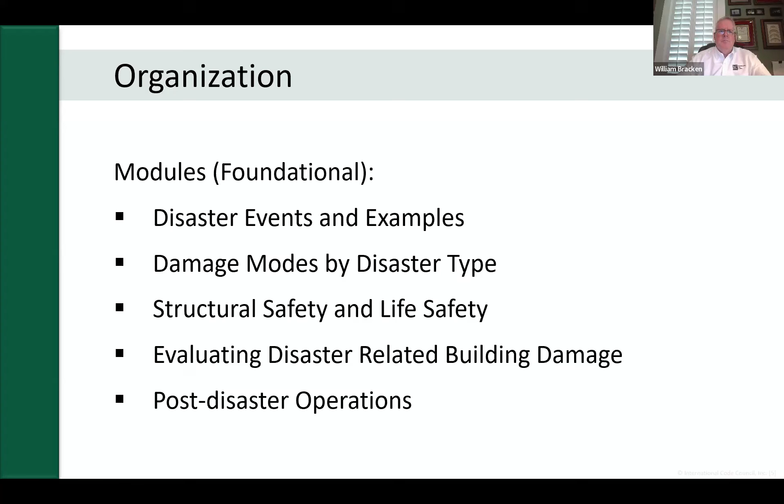And then the second type of module is an operational module. And when I say operational, what I mean there is, how do we actually do this? And what type of conditions, hazards, situations can we encounter when out there and doing these evaluations?

Finally, it gets into the actual processes, and it provides a vehicle for attendees or students to practice these evaluations through case studies, examples, practice examples, and so forth. And then finally, the ultimate goal of these evaluations are the placards or the signage that we will be posting on the buildings. And it gets into the types of signage or placarding and the rules upon which those placards are affixed to the buildings.

So as I said, the goals and objectives overarching are when these post-disaster evaluations are performed, when they are successfully executed, they will help to keep our citizens from entering potentially unsafe structures or buildings, while also minimizing any displacement or permanent displacement. And while those two concepts may sound to be in contrast, they are not.

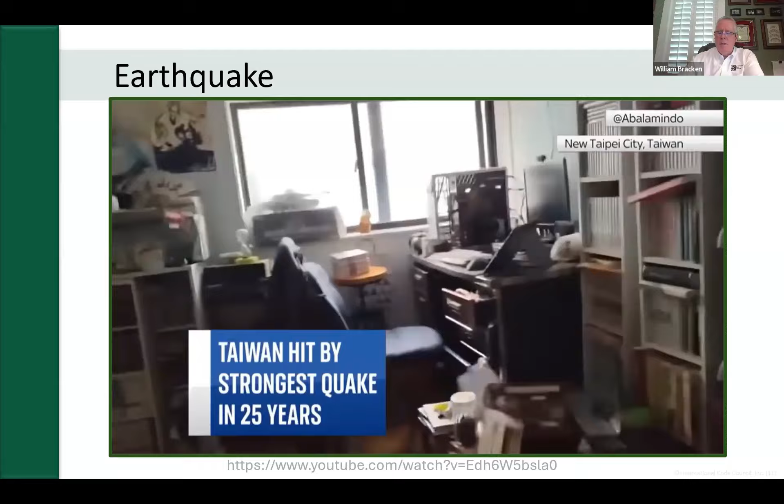This first one is some video footage. It's a compilation of videos that were put together based on an earthquake that occurred in Taiwan. And so you'll see some footage and possibly hear the sound on some of these. Not all of them have sound, but these video footages are generally about 60 seconds or so in length.

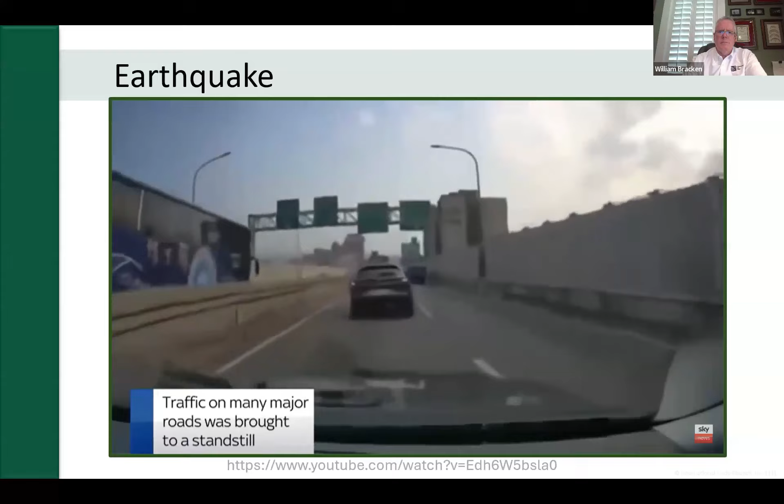So as I said, this is a compilation of footage, but both this image here and this one show basically individuals on a bridge. But the next series of images, you're going to see the outcome and some of the buildings that were impacted, such as the one you see on the slide right now.

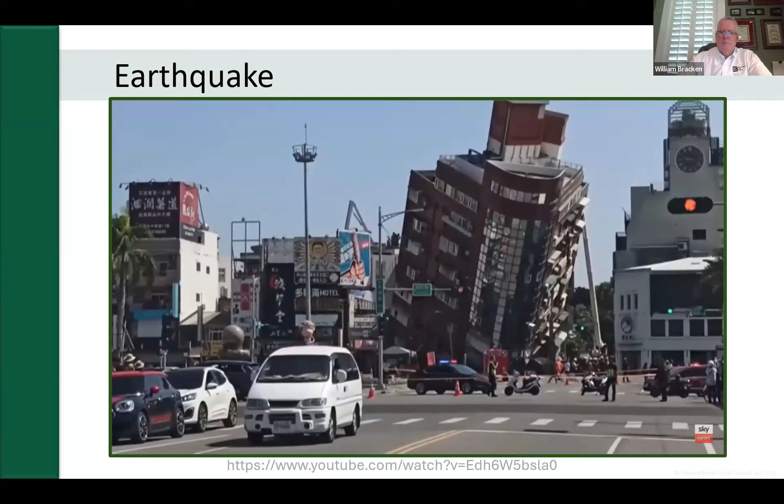So that was earthquakes, and that's the format you're going to see for each of the 4 types of disasters in this version. The next disaster type it talks about is flooding. And so some examples of flooding were the 2009, 2010, 2011 floods that occurred in El Salvador. Additionally, there were 2010, 13, 14, 15, and 19 flooding events in Bolivia. And then, of course, 2006, 2008, and then significant flooding in 2016 in Ecuador.

This next footage, again, to illustrate the impacts of flooding, is actually a compilation of flooding. This was coastal flooding related to a hurricane typhoon type of event. This was in the US. And what you're going to see is about 60 seconds again of footage, but you'll see the impact of storm surge and coastal flooding as it builds.

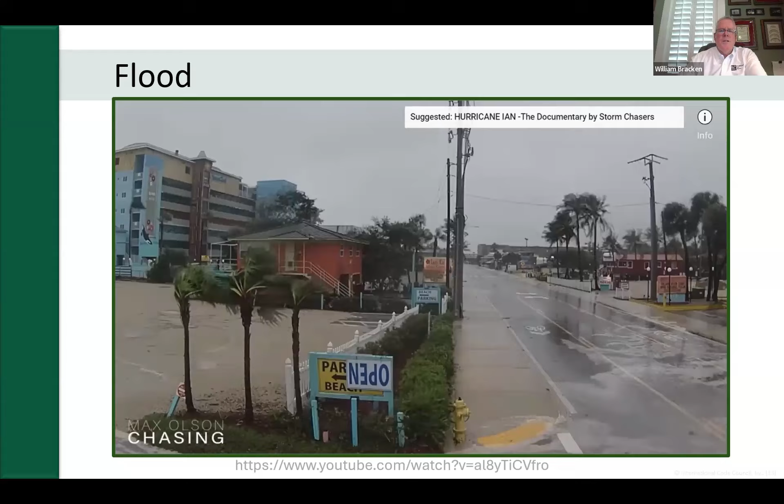What I'll ask you to do is, as this plays out, keep an eye on the building in the foreground, the reddish shaded building, and see how it fares as this water continues to build and the intensity increases.

So again, the purpose of the footage is to help those that have never experienced these types of disasters, or just to kind of ground where it is that we are. That's the intent of the footage. The third type of disaster that the training focuses on are high wind events. And so high wind events are actually broken into 2 subcategories. The first subcategory being tornadoes.

Some examples of tornadoes would be the April 1993 Buenos Aires tornado outbreak. That was an event that in 1993 resulted in 100 independent tornadoes affecting that region. Another example was in 2009, the tornado outbreak in Santa Catarina, and forgive me if I mispronounce anything, but nonetheless, that one particular tornado event resulted in destruction of more than 80% of the residences in that community.

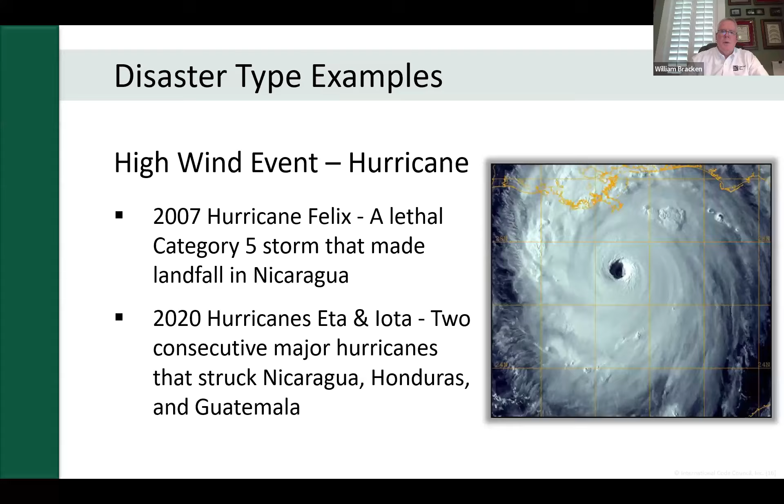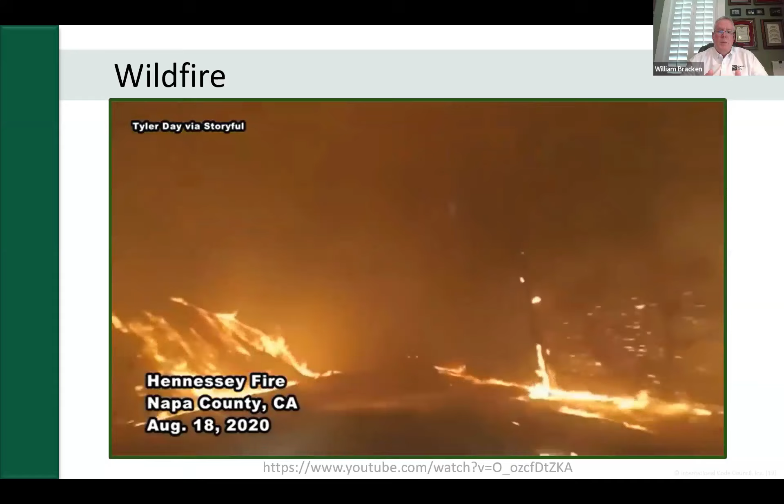This came out of Northern California. The footage here is from some fire crews that were in the fire. They were actually traveling from one spot to another when the fire changed direction, swept over, and they found themselves engulfed in the actual flames. This is from a dash camera, but the firemen successfully made it out. This gives you some idea of the intensity of those types of disasters. And then afterwards, most of the buildings were significantly or completely destroyed.

And then, as I said, at the end of each module, there's always the opportunity to provide further discussion, take any questions, provide any answers, and so forth. We will not see it as we move through the balance of this presentation, but it's worth knowing that at the end of each of the modules, there are opportunities to further discuss items.

The second module, having introduced the disasters and the disaster types, then gets into damage modes, or specifically, what are the various types of damage that these disasters can cause to buildings. Focusing on the 4 different types of disasters and keeping in mind that each of these disasters will have different impacts on buildings and the built environment. It's worth talking about how each of these disasters impacts buildings, because that provides a frame of reference for individuals going into communities after a disaster. They will already have some idea of what type of damage to look for and how to anticipate the damage that they will be evaluating.

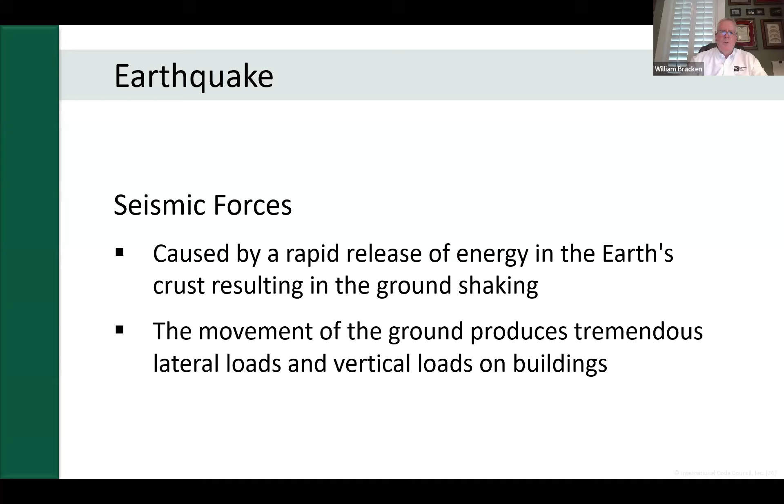In other words, all of the plates on the Earth's surface are constantly moving. When 2 plates become fused or stuck, the energy continues to build. As those plates continue to move, the energy will eventually overcome the friction force holding those plates together. The plates then release, and that is a release of energy. That energy then shakes the ground in multiple directions, forward, backward, side to side, as well as up and down. The ground is moving, and so naturally the buildings sitting on the ground are going to be moving as well. All of that is explained in much greater detail, so that the participants will be able to, in later modules, see how to look for that type of damage.

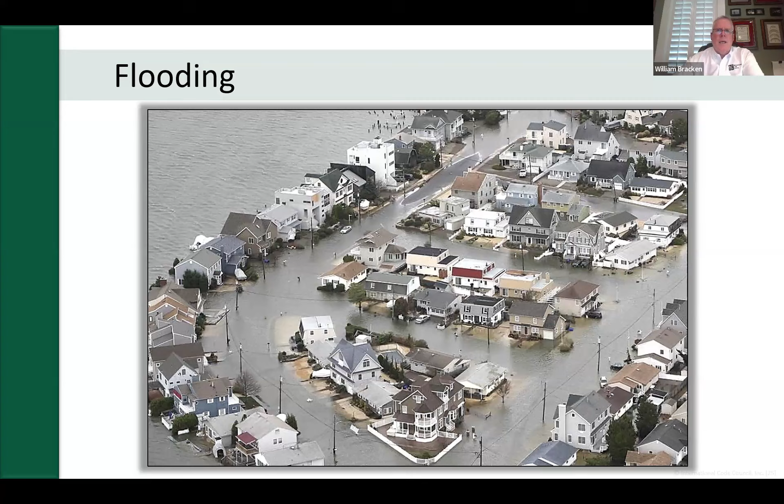The second type of disaster was flooding. Similar to earthquakes, what is a flooding event? How does it occur? And more specifically, how does flooding impact or damage buildings? Flooding can cause damage to a building in one of 3 ways. It can saturate the ground and possibly building components, and by saturating them, it softens them. That can sometimes lead to settlement or partial collapse of aged, deteriorated, or weakened building components.

The second method that flooding causes damage to buildings is through hydrostatic force. Hydrostatic force is that buoyant force, the force that basically causes ships to float. In other words, anytime you displace water, that displacement can cause the building to lift or shift, thereby damaging the building.

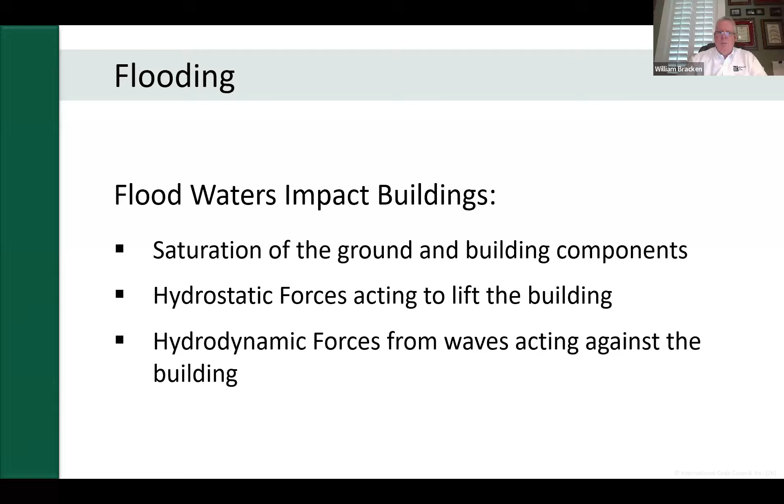The third type of disaster and damage caused by disasters is high wind. As I said earlier, we break it into two categories: tornadoes and hurricanes or typhoons. But really, whether it's a tornado, a hurricane, or a typhoon, wind impacts a building in three ways.

The wind flowing around and over a building will put pressure on the outside of that building, and that pressure translates into loads. So we want to make sure that the building is capable of supporting and resisting those loads.

But the other ways in which wind loads can impact buildings is by windborne debris, or picking up items, carrying them downwind, and creating openings in buildings downwind, breaking windows, breaking doors.

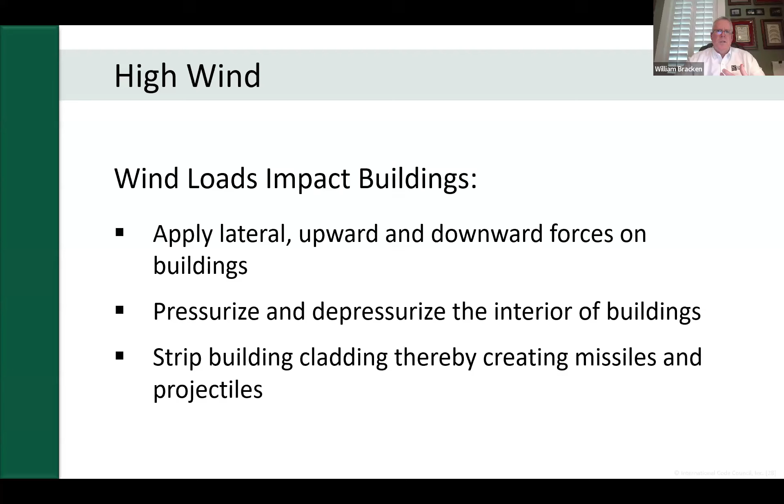The reason that's damaging, aside from the broken windows or doors, is once that opening is created in the building, the wind and wind pressure can get inside and pressurize the building. When that internal pressurization combines with the external pressurization, that's when buildings start coming apart.

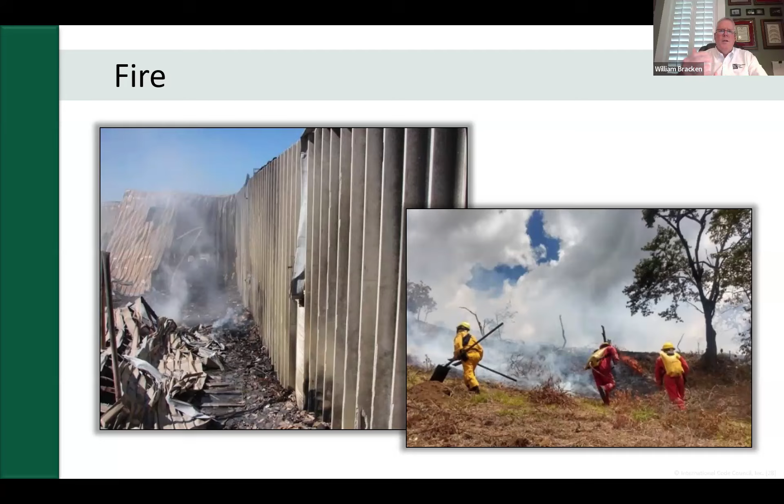The last disaster type is fire. Here we talk about how fire and heat, or thermal events, impact buildings. As you can see on this slide, it's the fire itself and the heat from that fire that matters.

Please keep in mind, it's not necessarily the flame that causes the damage. The flame is merely a byproduct. It's the heat, or the heat energy, that causes the damage.

The heat energy can change material properties. It will cause wood to burn. It will cause steel to elongate, soften, and deform. It can cause concrete to become brittle and crack.

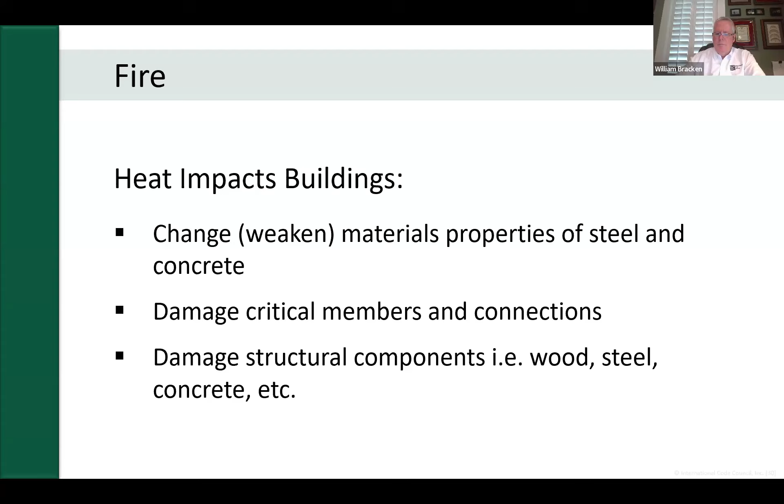So with fire, the focus is on the members, the materials, and what the heat energy has done to those components. As mentioned on previous slides, the training goes into much greater detail about the effects of fire and its impact on buildings, how to look at buildings affected by fire, where to look to determine if a building has been impacted, and if so, to what extent.

So I think you can see we start off with a discussion around disasters, then we go into a discussion around how those disasters and their effects impact buildings and the built environment.

Next, we go into the fundamental structural and life safety components that we need to know when evaluating these buildings. So to say it another way, this next module looks at how buildings are put together, and how we're actually going to determine if a building has been impacted by a disaster, and if so, to what extent.

This module focuses on the types of structural systems that exist. It focuses on determining how the evaluator is able to determine structural safety and how the evaluator is able to determine life safety. Because at the end of the day, all of this training comes down to making sure the evaluator is looking at these buildings and determining whether that building has basic structural safety and basic life safety or fire egress. We'll talk about the significance of each of those as we go through.

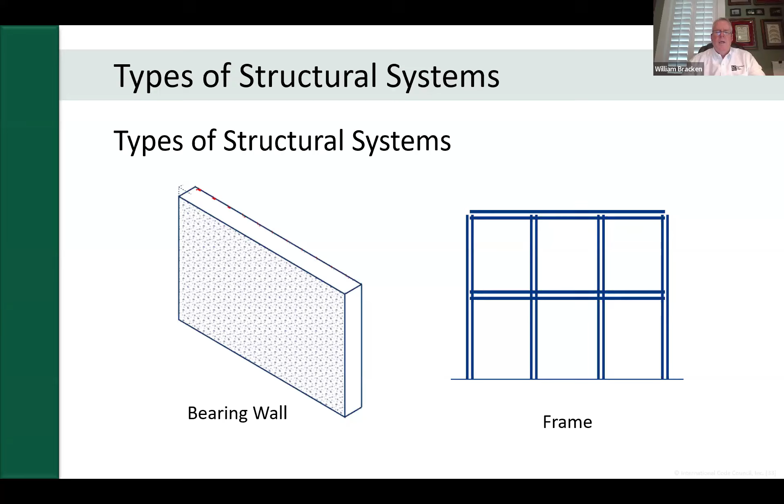And so the two types of structural systems are what we see on the screen here: the bearing wall system and the frame system. We go through and talk about how the bearing wall and the frame receive loads and how they're affected by overloads.

In this particular slide, you can see the bearing wall. The bearing wall is simply a wall that receives a load from above or from the side. That wall then carries that load down to the foundation, where the foundation resists that load.

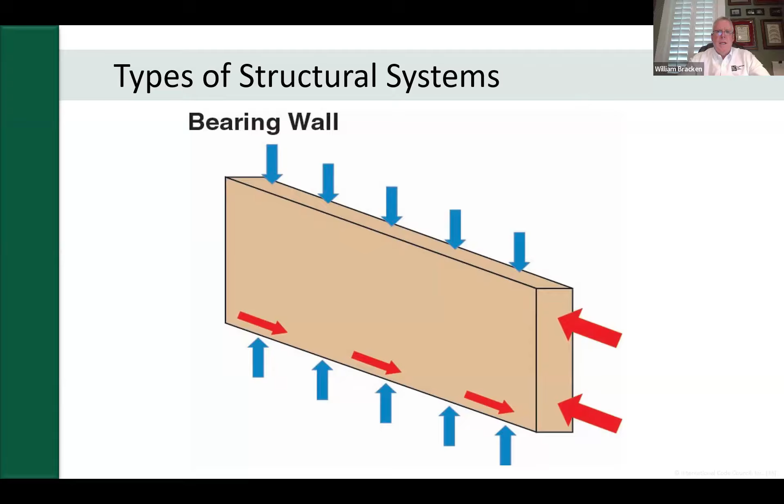As we apply loads to, in this case, a bearing wall, we need to understand how those loads travel through it, and the same thing with the frame. So with the frame, it's all about how the loads travel through that structure type. In a frame system, the load gets applied to the floor, then from the floor it goes to the beams, from the beams it goes to the columns, and ultimately from the columns it goes down to the foundation. That is our load path.

Understanding the load path through the bearing wall or the frame helps us know what we're looking at, what we need to evaluate, and what parts of the structure we need to determine have been affected or damaged by the disaster or not.

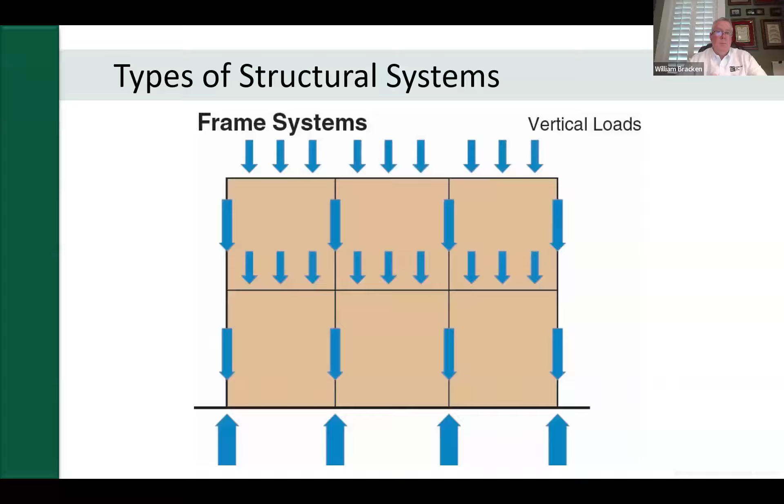Part of that process of evaluating the load path or structural components is, one, determining the load path the building relies upon. Once the evaluator determines the load path, they're able to look at the frame components, the bearing wall components, the connections, and the foundation to determine if there is adequate structural safety.

When going through that process of examining the load path, you also want to determine the redundancy and the ductility. I'll give you an example of that. The load path is, as we see on the slide here, and the training provides multiple examples for many different types of structures and structural systems. For the purpose of this presentation, I'm just using one as an example.

When we get to the load path, here we can see a traditional roof over an exterior bearing wall. The load path here would start at the top, go from the roof into the bearing walls or supporting walls, from the bearing wall down to whatever type of foundation system we have, and then ultimately down into the foundation.

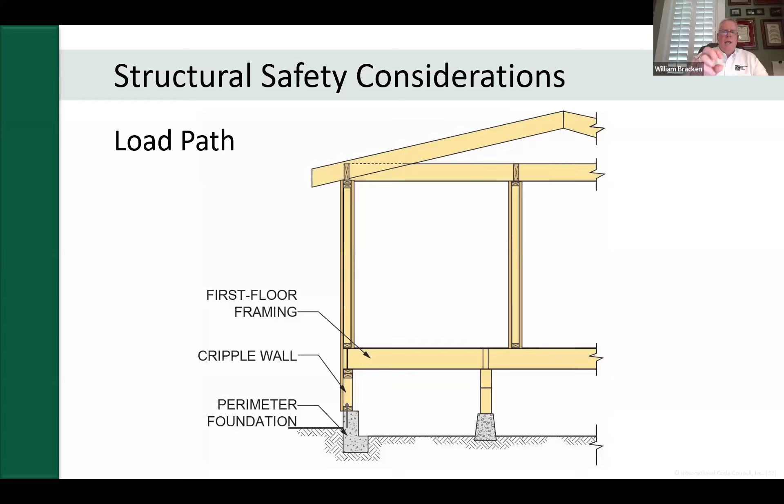It's the process that the trainer walks the attendees through for each of these elements and their connections: how do we identify them, and how do we evaluate them in the field?

The other part of evaluating structural safety is determining redundancy. On this slide, you can see two simple examples. The top example is considered a simple system, meaning it has no redundancy. As you can see in the graphic, it's made up of two columns and one beam. If it has no redundancy, if I lose one of these elements, then the entire system fails and falls to the ground.

As becomes apparent later in the class, in a simple or non-redundant system, that's when you get total collapse, the building falls to the ground. And quite honestly, we're not needed there, because even the basic resident, the layman, can identify when a building has completely collapsed.

Really, the focus is on what we need to evaluate when a building has redundancy, as we see in the bottom graphic. In the bottom graphic, we have three columns supporting a continuous beam. It is possible for that building to lose one of those columns, and that beam is still going to remain. That is what we call a redundant system.

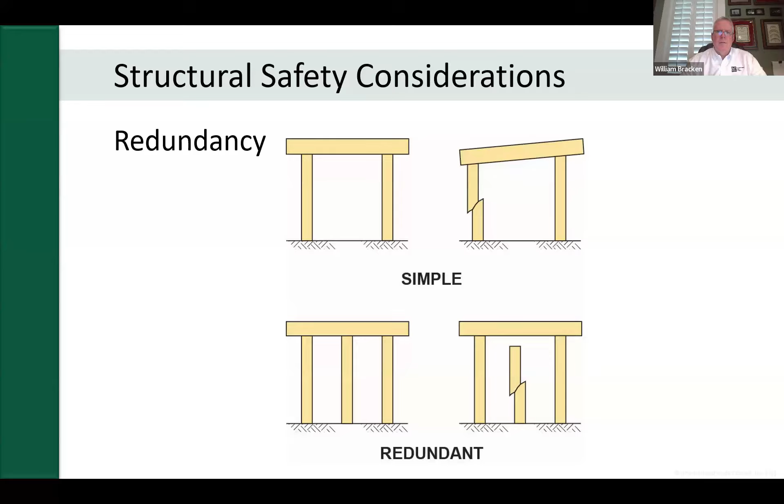The final piece of evaluating the load path is ductility, or determining ductility. When we say ductility, really what we are doing is looking at what the structural system is made of and determining if it may have additional strength beyond what we're seeing, or in engineering terms, additional capacity.

Simply put, we have two types of systems: one is ductile and one is brittle. In a ductile system, as you see in the blue portion of this graphic, that's a steel type of system, meaning if I have a structural steel frame, that frame has a great deal of ductility—it will bend and move and deform before it fails.

The evaluator is trained on identifying if that structural system has ductility, if it can continue to bend or move or not, versus a brittle system. A brittle system would be an unreinforced brick masonry structure that has no tensile capacity or no ductility.

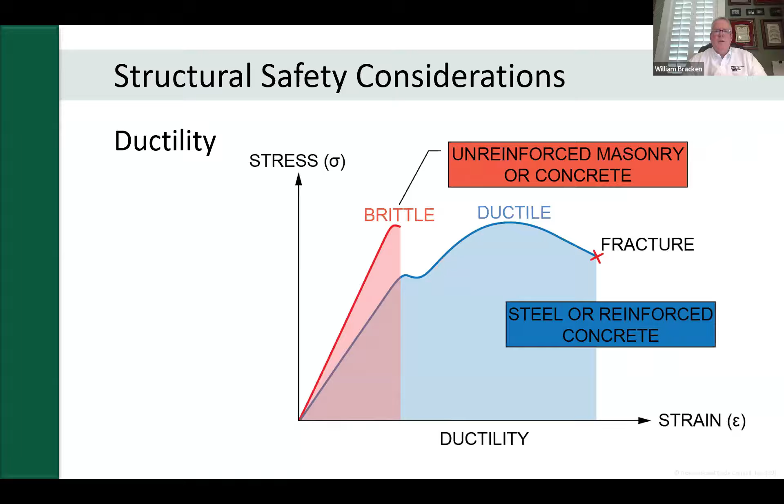In an unreinforced masonry system, there is not going to be much ductility. And so when it is subjected to movement or additional movements, it is subject to total collapse.

As I said, the training utilizes video footage to provide examples. This video, about 60 seconds, shows an unreinforced masonry building during an earthquake, I believe during the Mexico earthquake a number of years ago. When I launch the video, the camera will pan to the right and you'll see a multi-story brick building. The footage was captured by people who were evacuated from that building using their cell phone. This serves as an example of a non-redundant, brittle system that cannot handle movement, and you'll see the outcome.

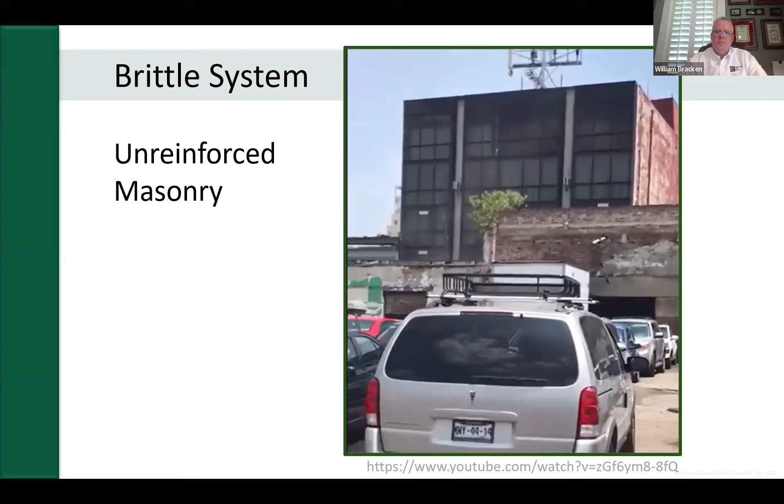You can see the building is shifting. It's moving side to side. So you can see that's an example of a brittle system that does not tolerate movement.

I have not included all of the videos. I've included a few here to provide some examples of the modes of training that are employed in this class.

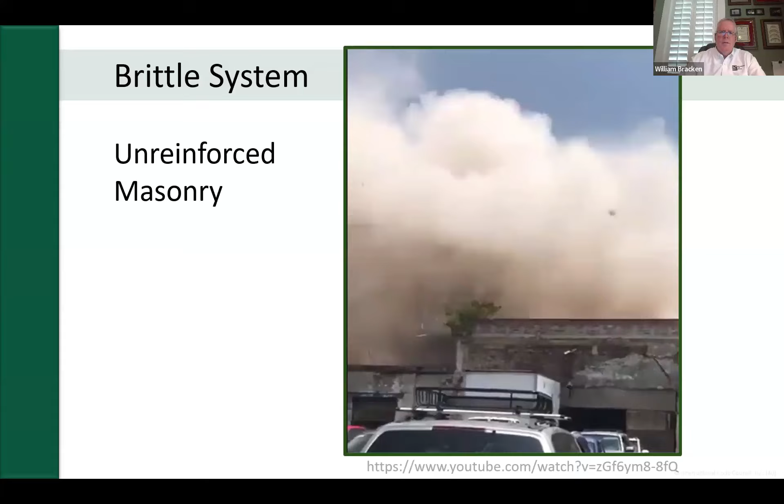So all of that was the structural piece. As I said at the start of this module, there is structural safety and life safety, or another term for life safety is fire egress. Structural safety is, quite simply, will the building continue to stand? That is key to us determining whether it is safe for the public to be in there. But the second component to all of this is egress, fire egress, life safety.

That is quite simply, if something bad happens, if the building catches fire, can the people in that building still get out safely? That is fire egress. In order for us to tell the public that a building is safe to reoccupy, the building must have structural safety and life safety, or fire egress. It's all about whether the public can exit that building safely in the event of a subsequent disaster, a fire, or some desperate need to get out.

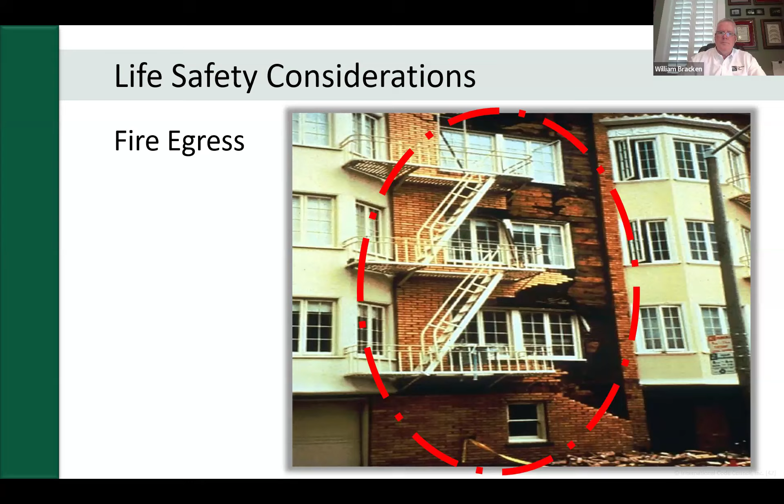As I said, the training goes through multiple examples. It pauses for questions and takes questions. This training is designed to engage the learner in as tactile and hands-on a method as possible.

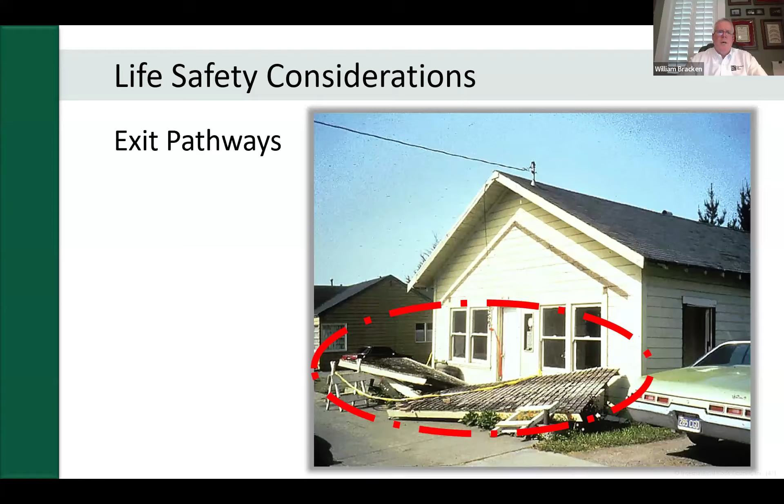Let me pause here for a second, open it up, and see, Jose, if there are any questions. I've noticed some items going into the chat box, but I haven't had a chance to look at them. If we have any questions, anything you want me to address at this point, I'm happy to get into it. So far, I don't see anything. I put a message there that I'll be monitoring the questions, but I don't see any questions at this point. Okay, I appreciate that, Jose. Sure.

At this point in the training, we started off with an introduction of the different types of disasters. Then we moved to how those disasters impact buildings, the forces and the manner in which they cause damage. The previous module talked about how, when evaluating a building, we have to identify that it has adequate structural safety and adequate fire egress. This module, module 4, takes all of that and brings it together by providing examples of damage to the different types of structural systems caused by the various types of disasters.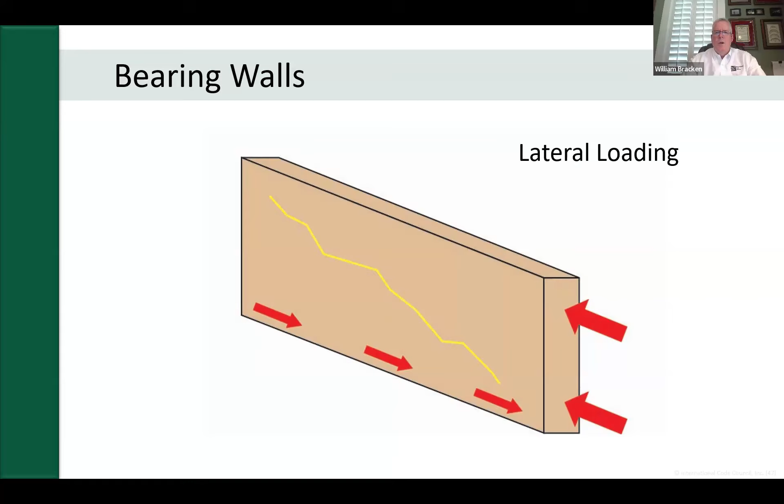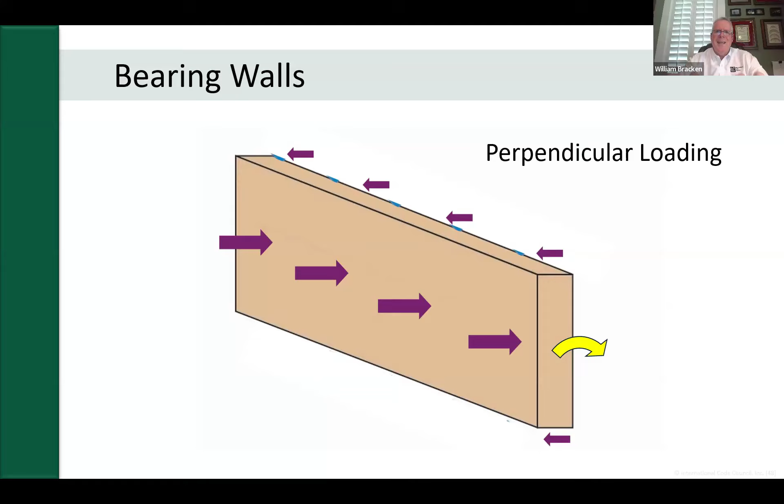The third method by which bearing walls can fail is when they are loaded perpendicular to the wall, resulting in bending, distortion, or rotation of the wall. Just as with the first two types of damage, the training goes through examples, providing photographs of this type of damage to help the evaluator identify or diagnose it when doing their evaluations.

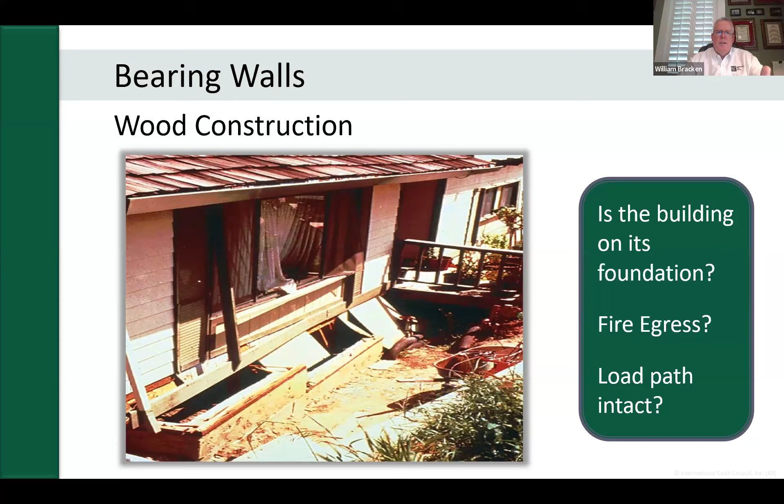This would be one type of example. In this case, we're looking at a bearing wall structure - a residential structure that was affected, and the upper bearing walls, roof, and structure were pushed or shoved off of the foundation. You can see towards the bottom of this image just how much that front wall has been pushed back, and the building has been pushed off of its foundation. This is used as an example throughout the training, providing photographs, illustrations, animations, and video footage to help the evaluator diagnose these conditions and interpret them from a structural safety and fire egress standpoint.

The other thing, and this is an interesting point to make at this point in the presentation and in the training, is that the point of this exercise is to look at the building immediately after a disaster, to determine if that building can be occupied by the public, whether it's safe for the public to occupy, whether there are limitations, or whether it's just not safe for them to be in there at all. So the process is to go through this, make that determination, and put a placard on the building.

But it's important that the evaluator recognize that placard, the signage we're going to put on this building, is not permanent - in fact, it's very temporary. What I mean is we are looking at this building immediately after a disaster. We are only making a determination regarding basic structural safety and basic fire egress. All of these buildings are going to be damaged and will require some method of repair, some extent of repair.

We are not making that repair determination. We are merely making a rapid evaluation of whether it's safe at this point in time for the public to go in and access that building. As time goes on, the building can become worse. The thresholds, or the level to which we will let people re-enter buildings, will return to normal. So this placard or signage we put on these buildings is temporary.

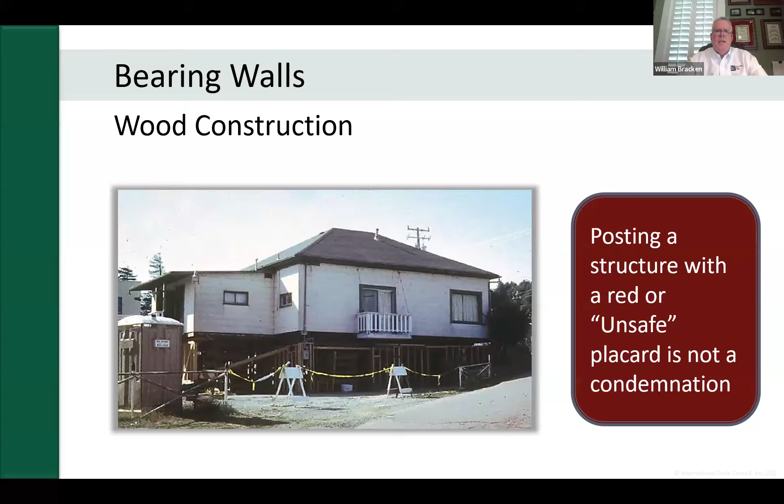So just some of the subtleties or finer points that are part of this training that are imparted or shared with the attendees so that they have that understanding when doing the evaluations. So just like we did that with the bearing walls, we then go into the frame, which are the column and beam structures.

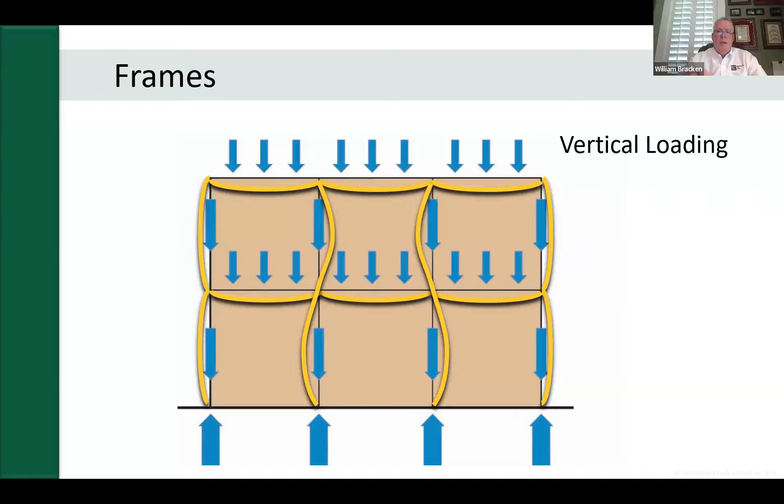So the column and beam structures, when they get loaded from above, you can see the blue arrows would indicate loading, and the load path, as we said previously, went from the slab to the beams, from the beams to the columns, and from the columns to the foundations. And so when this gets overloaded from above, it will cause the beams to sag or the columns to bend, as you can see in this graphic.

Bill, we have a couple of questions that I want to address. Yeah, please go ahead, Jose. Yeah, before you continue, because I think it's related to what you're showing. From William Hudson, are you considering the inclusion of Type 4 construction?

So I appreciate that question. Thank you. The Type 4 construction, so we have various types of construction that relate to flammability, right? Or how protected it will be from fire, or what it's made of, so that we can determine the level of fire protection. This training and this exercise does not consider any compromises to that. What this training focuses on is far more fundamental. This training focuses on strict structural safety and fire egress. So that's what this training is.

The evaluation of the type of construction and the impact the disaster has had on the type of construction and its fire rating, so to speak, that is at another level. That is done later in time by your design professionals. Okay, yeah, he says that he was thinking about the reactions in heavy timber. Okay, so with heavy timber, that would be a frame type of system. And so in a frame type of system, the evaluators, the attendees of the class, are trained how to identify the load path. So in a heavy timber system, it would be identifying the load path as a column and beam type of system. So you evaluate the columns, the beams, and the connections.

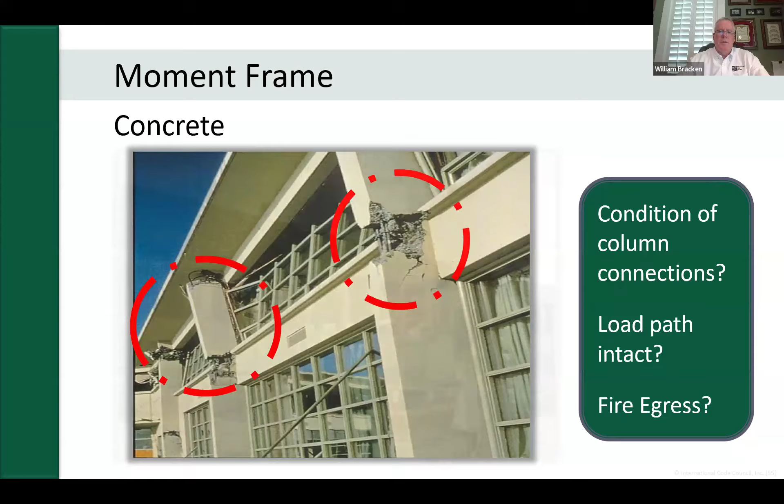This slide and the next slide are also examples of the concrete moment frame structure. In fact, this one was in Southern California back in the 1990s, an earthquake down there. This was a concrete parking garage that was damaged by the earthquake. And so in this image, you can see the parking garage immediately after the earthquake. And inside those circles, you can see where it is the column to beam connections that have failed.

Now, this slide also serves as a point of illustrating redundancy. And so, as I said earlier, part of evaluating a load path is also determining whether the building has redundancy, why it is still standing, if it is still standing. And so in this example, all of the beam to column connections had failed, but the building was still standing, and that was due to redundancy.

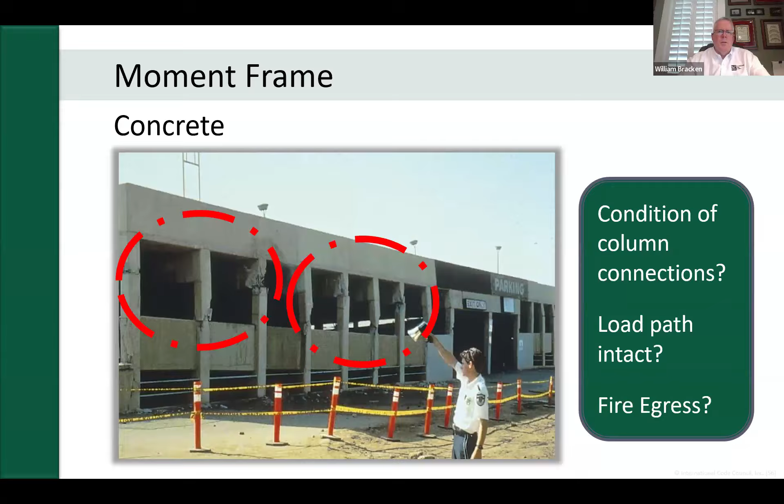The point here is just because a building remains standing after the disaster does not mean it is still safe to occupy. And so while this is what the building looked like after the initial earthquake, this next slide is what it looked like after the very first aftershock.

So the earthquake caused the damage. The building remained standing because of redundancy, but it did not have adequate structural safety. And that point was illustrated when the aftershock occurred and the balance of the building collapsed, as you see in this slide here.

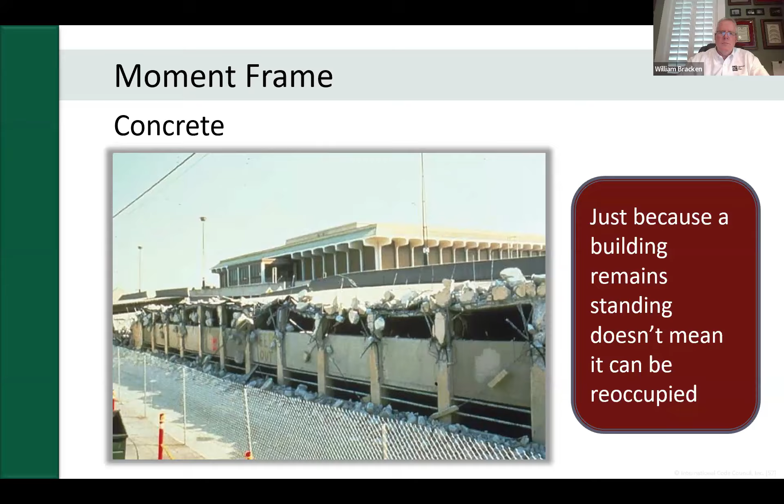And then, as I said, the training talks about bearing walls, it talks about frames, and then it gets into precast systems. And so with precast systems, it focuses on precast segmental systems as well as tilt wall systems. And it goes into them in a fair amount of detail. For the purposes of this presentation, I'm just going to show you a few slides of the segmental example.

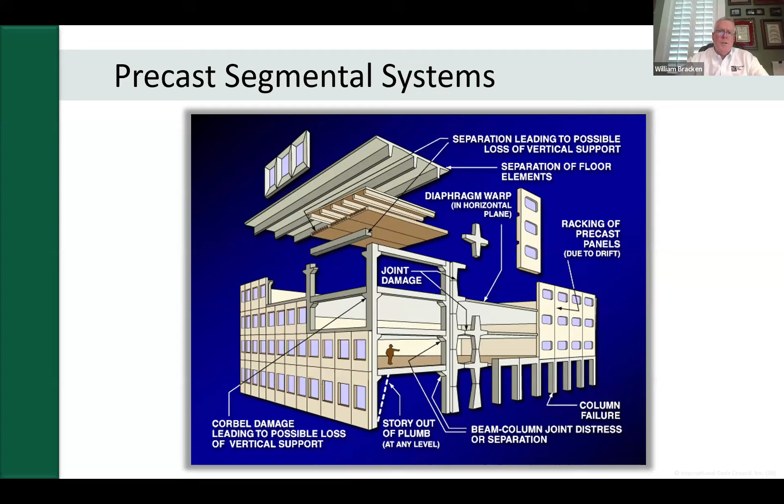But a precast segmental system is when the columns, beams, slabs, wall segments are precast offsite, brought to the site, and then assembled on site.

And so the training goes through and provides examples, as you can see in this particular slide here. This was a parking garage. It was precast segmental, brought to the site and assembled. This damage that you're seeing here was actually the result of a flood event. In fact, the flood event here was roughly 4 meters deep of flooding.

So what happened is the first elevated floor became submerged in the floodwaters. The floodwaters then lifted that floor off of its supports and dropped it to the ground. And that's what you're seeing in this image. The significance of this is that, and this is typical to all types of precast segmental systems, when that slab was lifted off of the supports and dropped to the ground, that slab was not only being supported by the columns, but that slab was also bracing the columns.

And so the significance here is while the structure is still standing, the upper portion is very badly damaged, and the columns, which were designed to have been braced by that lower floor slab, are no longer braced and are now only capable of supporting half the load they were designed to support. So again, the training helps to educate the evaluator or the participant on how to read damaged buildings, how to evaluate the load paths, and how to determine when the building's structural integrity has been affected or not.

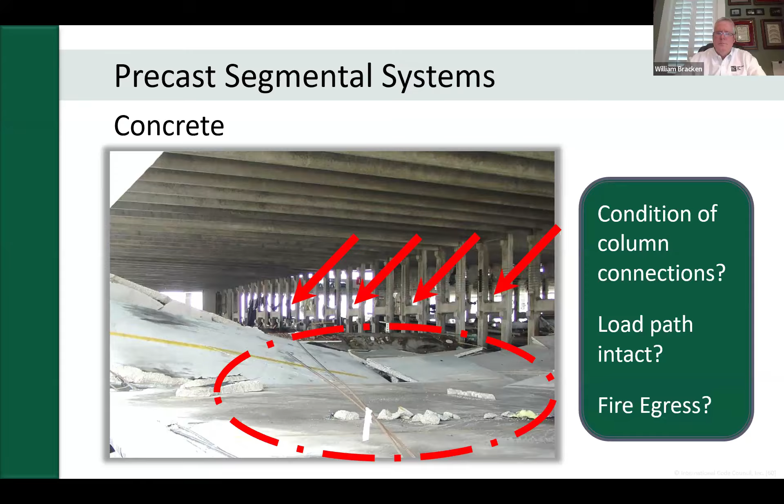This is some video footage of a parking garage, parking facility. And one of the things that this training also talks about is progressive failures, continuation of collapse, and so forth. And so it also serves to reinforce that just because a building remains standing after a disaster does not mean it's safe to occupy. And so what you're going to see here when I launch this video footage, it's just a few seconds long, but what you will see is that as the segments and the sections begin to fall, other sections that were dependent upon it also begin to fall. So let me play that.

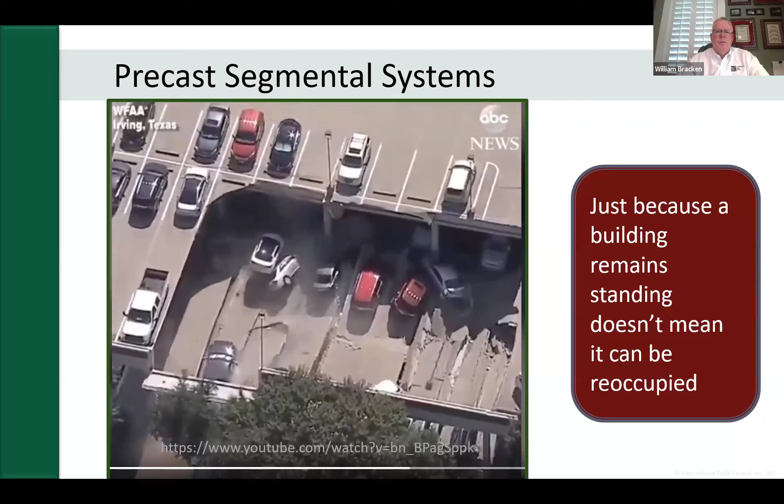So you can see in this particular example, it was like a domino effect. So the 2 slabs failed, then the next slab failed, and then it actually continued on through the structure. So just because a structure remains standing after a disaster does not mean it's safe to occupy. So that is that module.

And, again, at the end of each module, there's examples, there's discussions, making sure that the attendees are understanding these components, these foundational elements. The next module is post-disaster operations. And at any point here, Jose, feel free to jump in if there's any questions.

So this next module, post-disaster operations, this is where we will take a break from the structural and the disaster stuff. This is the piece that will very much be modified to the jurisdiction. In other words, this is the piece that talks about disaster events and their phases. It talks about evaluator preparation. It talks about evaluator certifications. It talks about deployment of evaluators, and then finally demobilization of evaluators.

It's inside of this module that any country-specific, region-specific rules, procedures, forms, authorities, all of those elements will be incorporated. And this presentation is designed to be modified so as to make it region, country, or administratively adapted for use.

It also talks about some basic personal protective equipment that evaluators will need when going into the environment and performing these evaluations. It talks about clothing, articles of clothing, items that they can bring with them, items that they'll want to have on them, types of clothing, eye protection, head protection, boots, these types of things. It goes through lists.

And the materials that are provided as part of this training will also have these key items, and in this particular case, lists of individual items that the evaluator can utilize when packing their bag, when going into these spaces, when going out the door to do these evaluations. It provides a list to refresh them and remind them of what they will need to take into those environments.

It talks about evaluator certifications. You know, what is required to do this, what types of training are out there, and what types of certifications will they be provided as a result of this training. I can share with you that one of the things being developed by ICC on an international level, and certainly when taken into Central and South America and the Caribbean, is providing a certification card to indicate that an individual has been through this training and has an idea of how to do this, what is important, and someone that hopefully the jurisdiction can rely upon when doing these evaluations.

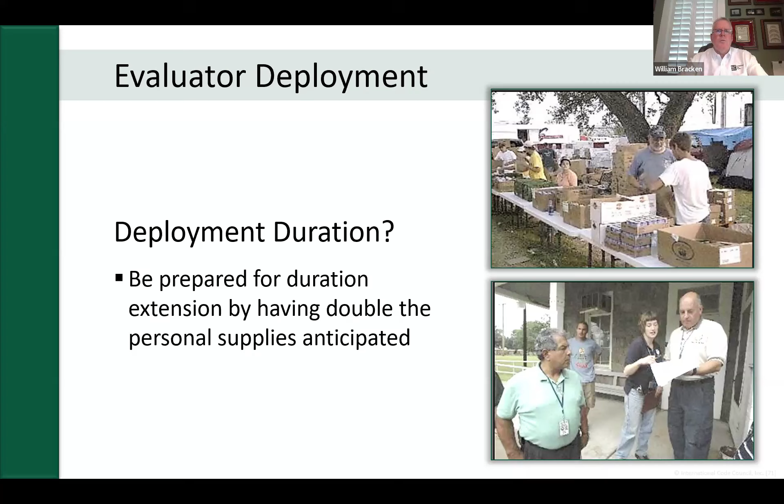Individuals going into these environments, like any tool that we would use, they have a half-life, they have a shelf life. They will become exhausted at some point. And so after 2 weeks to 3 weeks, that resource becomes not as effective anymore. And so we want to rotate them out, pull them out, and bring in fresh resources or fresh individuals to do this. And then finally, evaluator demobilization.

And so it's also educating them and providing an understanding that they're going into this environment to help that community by determining what structures are safe to enter, which ones are not safe to enter, and what kind of restrictions exist on those that people can enter. But it's also very, very important that the evaluator understand that the thresholds, what buildings are safe to enter or not safe to enter, are established by the locals, by the authority having jurisdiction in that environment. That is not established by the individual evaluator. I am not going to use my own criteria. I use the criteria that the local jurisdiction has established.

That's a key point. Also, a key point is respecting the citizens in that community by protecting their privacy. So photographs, documentation, whatever is collected during that disaster is the property of the authority having jurisdiction. It is not something I'm going into to collect and to show the world, look what I did. It's not about that. It's about respecting the community. So, as I said, that is the piece of this training that is very much customized to the region, the environment, and the political climate that we'll be working in.

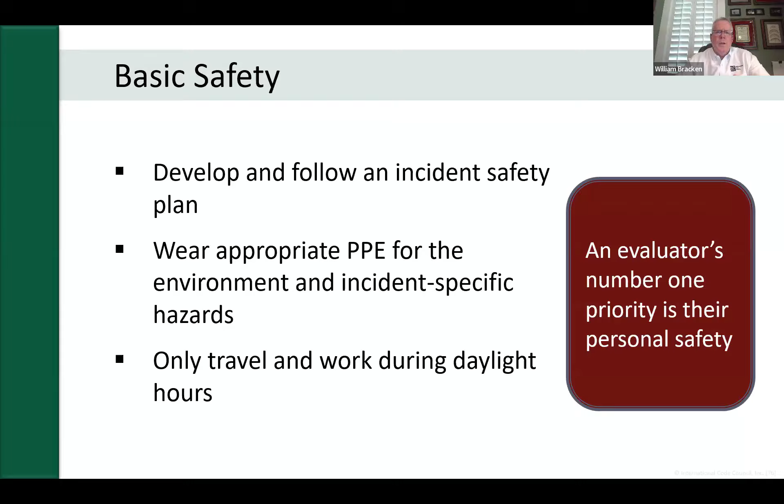Other basic safety includes the personal protective equipment we talked about previously. It highlights that when doing these evaluations, we're only going to do them during daylight hours for obvious reasons, and we're going to do them as a team—always teams of two. That's so you have multiple eyes looking at the structure, and individuals looking out for each other. It also talks about making sure members doing these evaluations are identifiable, so residents can quickly see they're there to help and not for nefarious or malicious reasons. The training gets into how to survey and avoid hazardous situations, and when it is safe to enter buildings.

It moves into environmental hazards, and environmental hazards actually fall into a series of subcategories—collapse hazards, secondary collapse, and others. Each of these is illustrated and explained, with practice examples that individuals will utilize throughout the training. In each of these categories, they're illustrated, and I'll share with you that this particular module, this particular area, is the fastest changing.

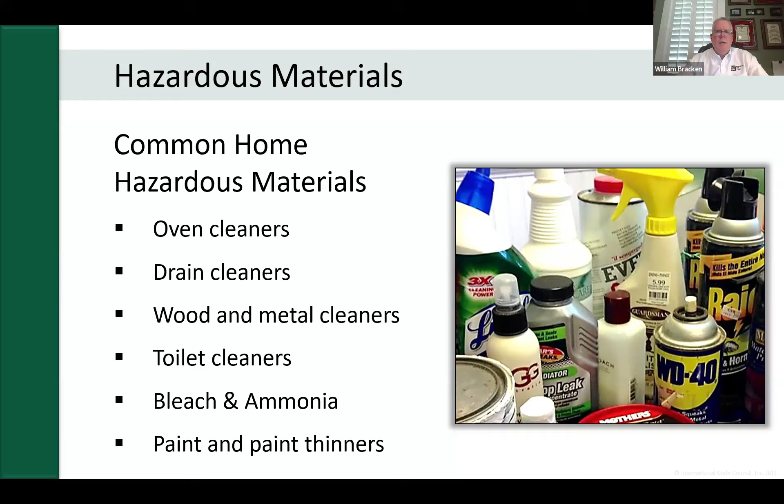Here on this slide you can see examples of common materials used for cleaning homes and places of residence that, in disaster environments—when spilled out and possibly mixed together—cause extreme hazards to individuals working in these environments. This helps increase awareness and keeps it front of mind, not just to evaluate the building, but to be mindful of your environment and take stock of what's around you that can cause harm. It also educates the evaluator on how these materials enter our systems and cause harm.

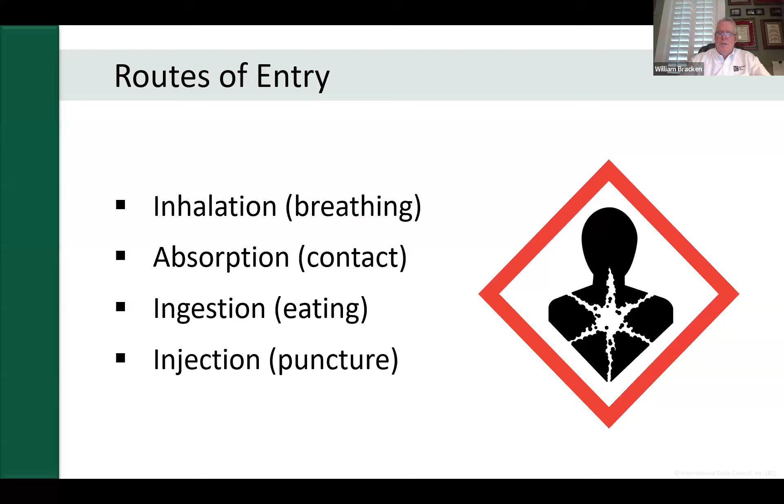Any one of four methods, as shown on this slide: breathing it in, physical contact with it, ingesting it—not so much that they'd eat something found in a disaster environment, but if they're working in that environment, handling and moving things, whatever gets on their hands, if not properly washed, will wind up in their system. That's what we mean by ingestion. And finally, any scratches, scrapes, or punctures also serve as a vehicle through which hazardous materials can enter our system.

This particular module on disaster-related hazards then gets into how to identify those hazards, how to evaluate those hazards, and how to avoid those hazards.

The identification and evaluation process has a specific procedure that this training utilizes. The training goes through it in great detail with the evaluators, and as I said earlier, there are resource materials provided. ICC is currently in the process of looking at getting those converted into Spanish and various dialects so they can be deployed and relied upon.

Finally, there is a section dealing with human factors, educating the evaluator on how to deal with survivors in a disaster environment, and how to be mindful of themselves. They will also be in this environment and may be affected physically or emotionally. There's a piece that covers how to deal with survivors and communicate with them, because the survivor has just experienced a very traumatic event and needs to process that, but they're not going to be thinking clearly.

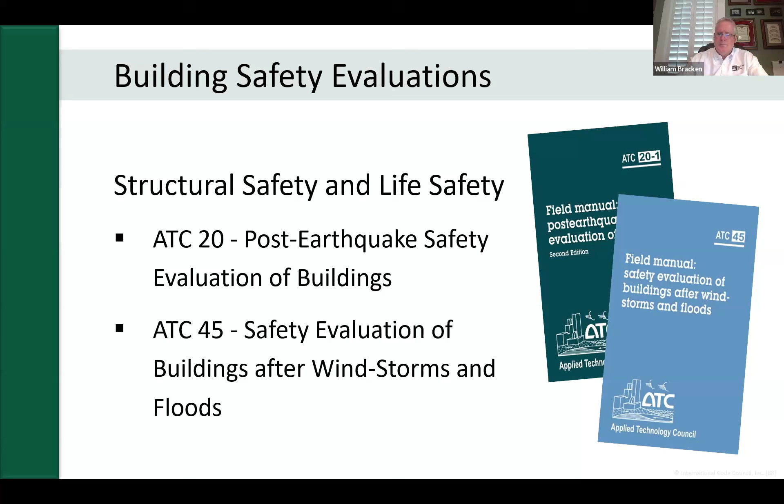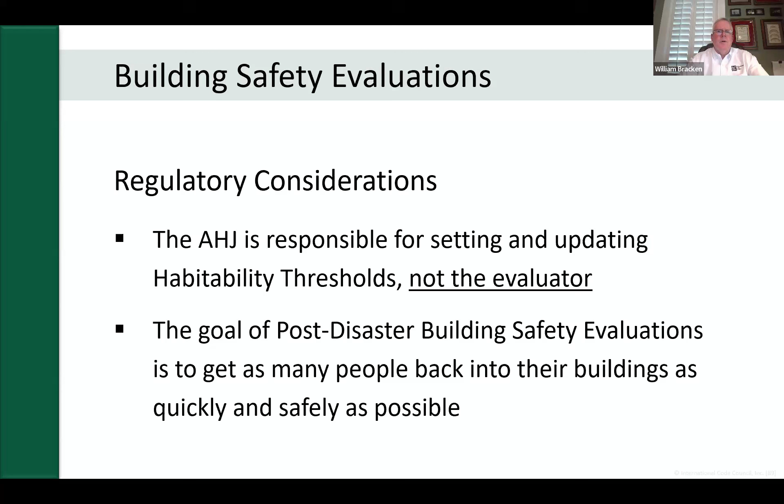The other piece, and I mentioned this previously when talking about tailoring this training and the materials to various regions or legal jurisdictions, are regulatory considerations. Regulatory considerations can be absolutely incorporated into the training based on the region they're to be deployed in, and should be incorporated into the training and the deployment so that if you are bringing people in from outside your region or your country, they will know what the rules are, what the regulatory considerations are, and what they have the authority to do and not to do. So that is very much a component of this training and the materials.

So as I said, the rest of this will go very quickly. I will simply acquaint you with what we are doing here in the States and what will be developed for implementation outside of the US.

So inside the States, we can do either a rapid assessment or a detailed assessment. But I will tell you that what is evolving in the US, and what will be incorporated into what ICC creates for use outside of the US, is that the rapid and the detailed are becoming fused together.

When this process was originally conceived, the rapid was more or less just an immediate assessment of the type of damage -- can we placard the building? Whereas the detailed was more thorough -- let's put a placard on the building to identify all of the hazards. So what I'm seeing through my years of doing this and teaching this is that these two are being put together.

And so there's going to be one assessment that is actually conducted. As it was originally envisioned, there was a rapid evaluation, defined as an initial general evaluation of the damage and the safety, so as to quickly identify and post or placard the building. The evaluations were to be done by teams of 2, and the evaluation would take 10 to 30 minutes per building. And I will tell you that even the detailed evaluations, which you'll see in a second, can be done in that same time frame.

So the detailed evaluation was originally intended to be a follow-up type of evaluation. But what we're seeing now is the process is the same, the forms are the same -- it's really not that much more information. We're spending an extra few minutes per structure. So really, what we're seeing is this is what we do: the detailed evaluations can be done in as rapid a time frame as the rapid evaluations.

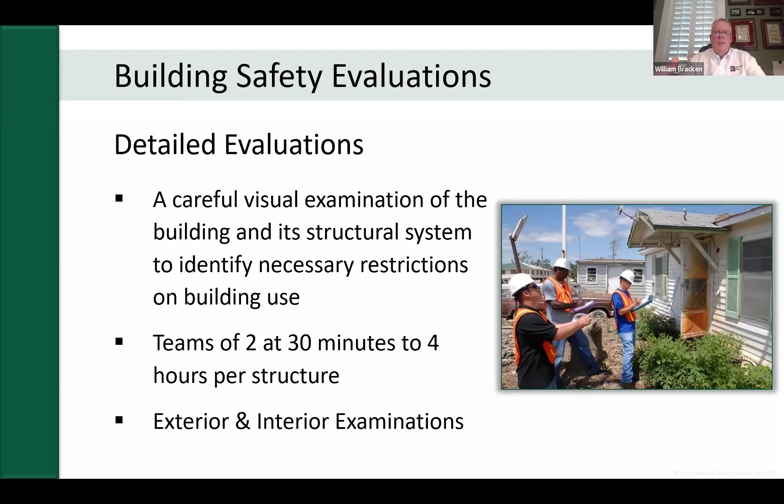The detailed evaluation is a careful visual examination of the building, its structural systems, and its fire egress, to determine if there are any restrictions on the building. These evaluations are also done by teams of 2 and can take anywhere from 30 minutes, sometimes up to 4 hours in length. That's not an efficient use of our resources if they're taking 4 hours -- these are really intended to be rapid visual evaluations. The reason the manual says 4 hours is because if you go inside the building, that significantly slows you down and can take much more time.

So those are the types of evaluations.

The next module, and again, this is going to be US centric, but it gets into the actual forms and process. It goes through the forms themselves. There's the ATC 20, put together to evaluate buildings after earthquakes, and the ATC 45, put together to evaluate buildings after wind and flood. The 45 on screen here was for wind and flood. The process is the same regardless of the disaster, regardless of the manual or forms you're using. The process will always be the same.

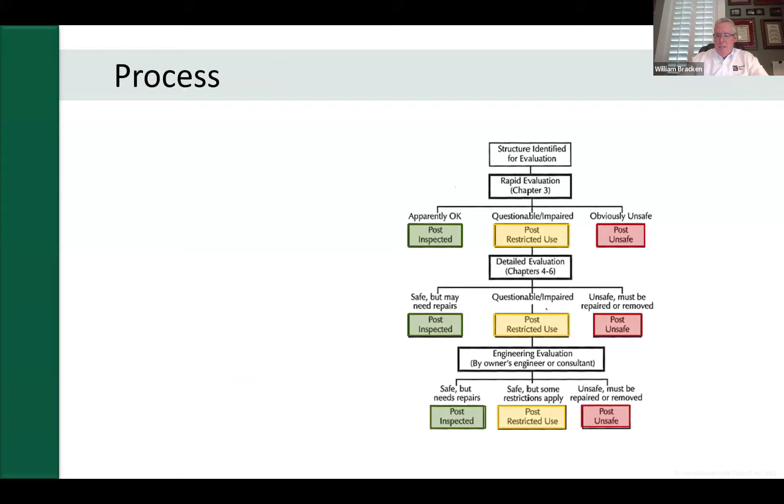We begin with a rapid evaluation. The rapid evaluation is intended to identify structures that are obviously green, meaning okay to go back into and re-inhabit, and structures that are obviously red.

Excuse me one second. While I take a drink break.

One comment that somebody mentioned in the chat is that it's important for the approach path to do the evaluations safely, because depending on the height of the building, aftershocks could cause objects to fall and endanger the evaluator. So it's important to be safe when these guys are going out there doing the evaluations of the building. I appreciate that comment, and that's absolutely true. That's covered in the training when we get into collapse hazards, falling hazards, situational awareness, the initial size up. So yeah, that's a point. And continually throughout the training, we emphasize that the evaluators' number one responsibility is to their personal safety. So yes, that's a very valid comment. Sure.

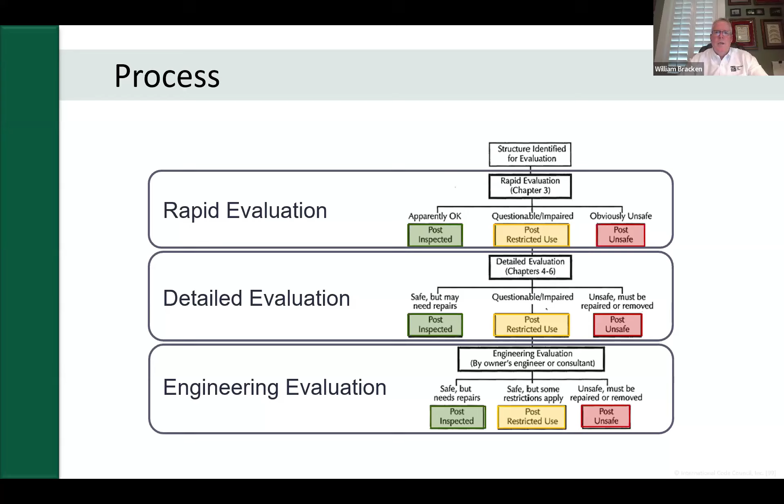So you can see where if we just go straight to the details, then we'll have the information that we need. The third type of evaluation is not part of what we're doing here — it's the engineering evaluation, or the design professional evaluation. That's done as part of the repair process, where we go in and say how badly damaged is it, how badly damaged are the connections, what elements need to be repaired. That is not done under this; it's done as part of the repair process at a later date.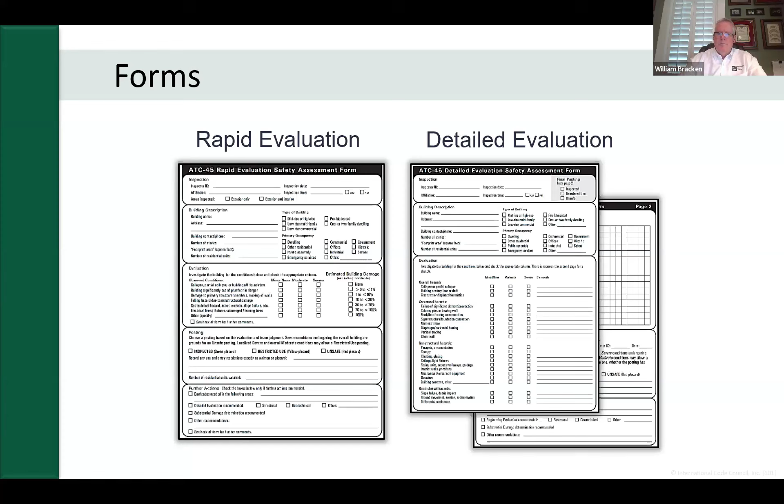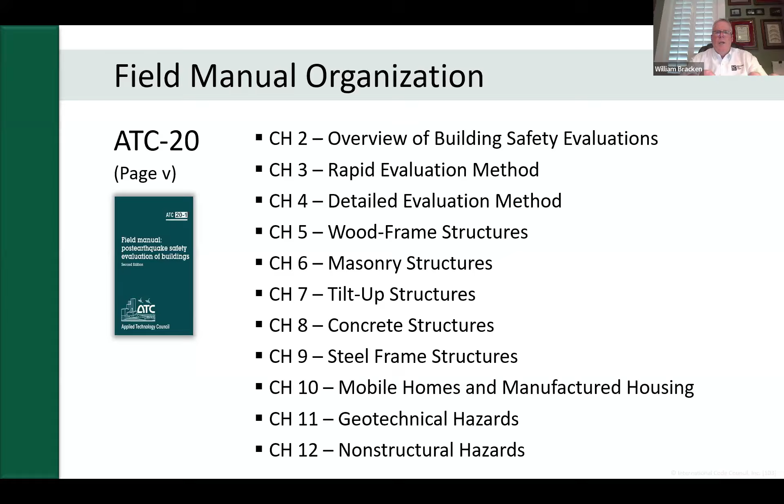The organization of the field manuals — this is if you choose to use the ATC manuals, but as I said, unfortunately they are not going to be translated into Spanish, ATC has declined to do that. But if you choose to use these, this is how they're organized: it starts with Chapter 2 as an overview, Chapter 3 talks about the rapid evaluation process, Chapter 4 talks about the detailed evaluation process, and chapters 5 through 12 focus on the type of structure.

And so really the way these books are laid out is I identify what is the type of structure, what is the damage I'm looking at. I can then open the book, find an example, and then the book will give a recommended posting, red, yellow, green, based on the type of damage. But here's the magic to the whole process.

Once the evaluator has been properly trained and the evaluator understands how to evaluate load path, how to determine when a frame has been damaged or when a bearing wall has been damaged, when the evaluator can accurately identify structural safety and life safety, you don't need these manuals, right? We can develop and deliver this training so that we don't need these manuals.

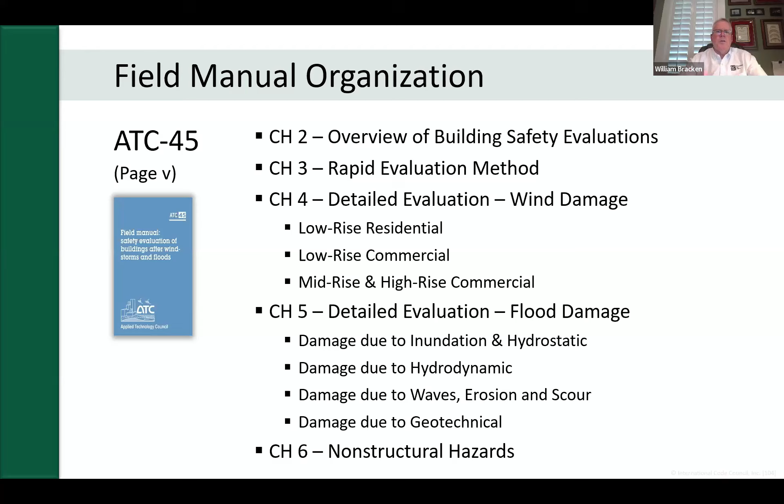These manuals are if you question yourself, or if you're new to this, or we want to train people outside of the design professional community, right? That's where these manuals come in. And then finally, the placards. So with respect to the placards, I mentioned this previously.

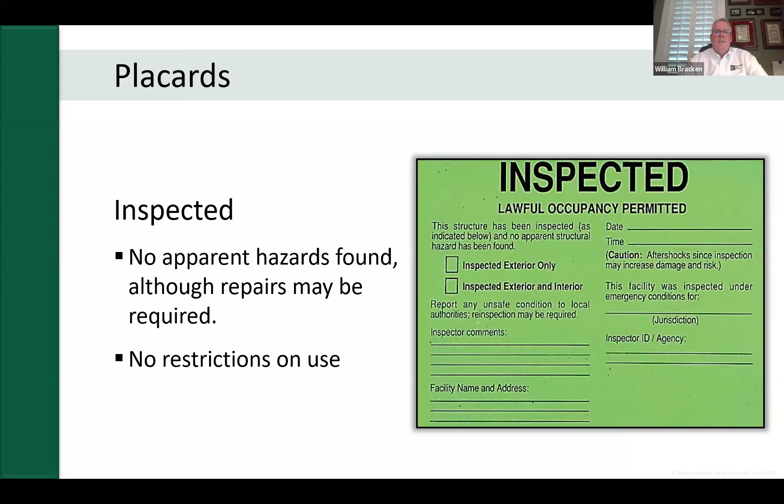There may be broken windows, broken floors, maybe we're losing some roof materials, but there are no apparent hazards and there are no restrictions on the use of the building. The building can go back into full use. If it's a residence, people can go back to living in there. If it's a place of business, business can be conducted in there. That is the purpose of the green. Green does not mean it's undamaged. Green simply means there's no restrictions on its use.

The next category, the next placard, is the yellow placard. Yellow is intended to be caution. The building has hazards. The building has limitations. And there are restrictions on the use of the building. So for example, if it's a residential building, there might be a restriction, it cannot be occupied, meaning the residents can go in, they can collect their belongings, they can gather up their items, they can begin making repairs, but they cannot live there. That would be an example of restrictions.

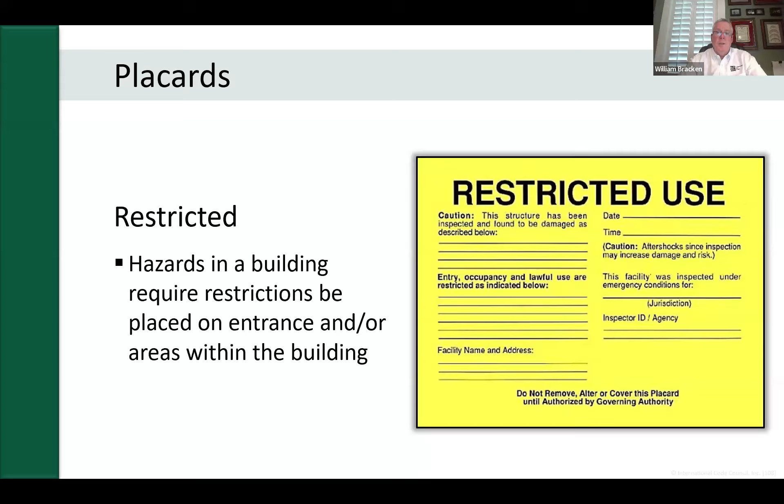Another example of restrictions would be if electrical distribution within the structure has been compromised. The restriction may be, do not energize this building until electrical repairs are made. So that's the purpose of the yellow placards, to communicate to the public that there are restrictions on the use of the building. The building is damaged, there are hazards, and there are restrictions.

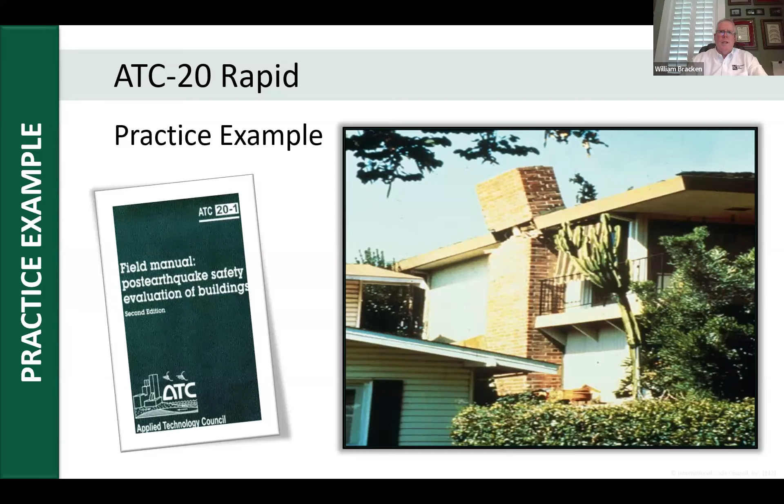The training then goes into practice examples. And so we begin practicing this process, the evaluation and the placarding, with the students in the class, making sure that they're trained up and that they can demonstrate an understanding of the process.

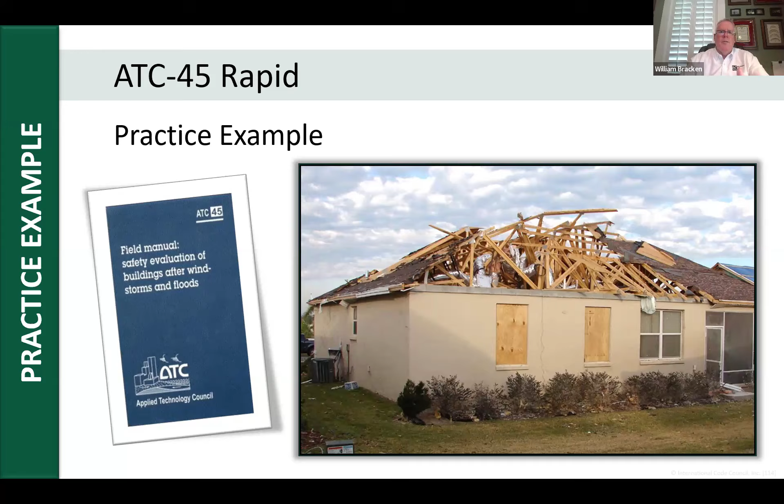As I've been emphasizing, it all comes down to structural safety, life safety, identifying hazards, and respecting the locals, the community, and the authority having jurisdiction. That was on the earthquake. We do the same thing with wind examples. We can do this with flood examples. We have scores, tens and tens of examples, practice cases that we use in the training.

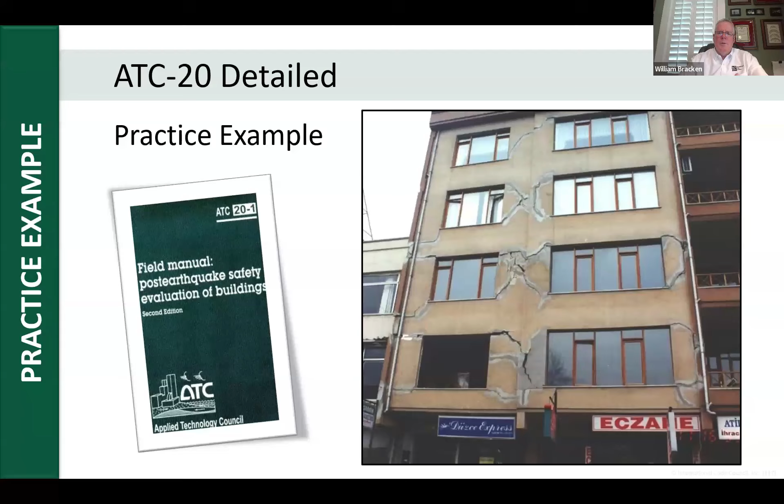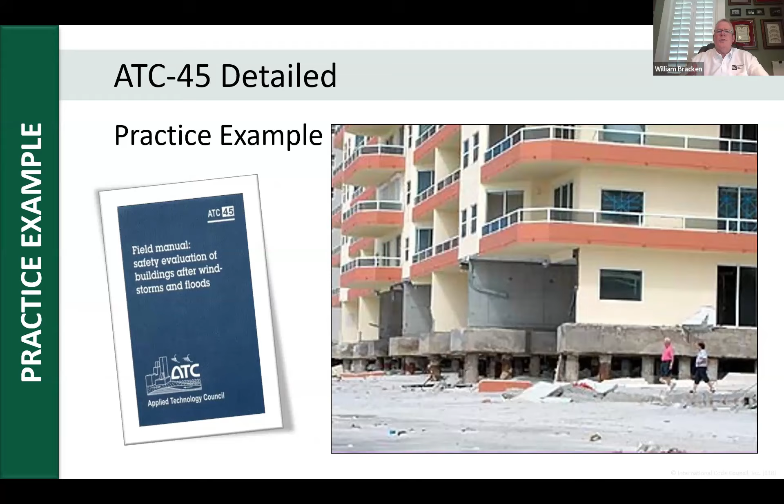And then this would be a flood example that the class goes through. That particular case was coastal flooding. That's a beach area. You can see how the ground floor was washed out. And so it's, again, emphasizing, practicing, reinforcing this process, making sure that the attendees truly understand what they're doing.

And then finally, wrapping up with the placarding, we talked about the 3 different placards that we will be posting. And then we go through the rules. These are more or less universal rules. They absolutely can be adapted. But the universal rules are that each building structure receives one designation. In other words, that building is either red, green, or yellow. We're not going to do different colored placards on different sides of that building.

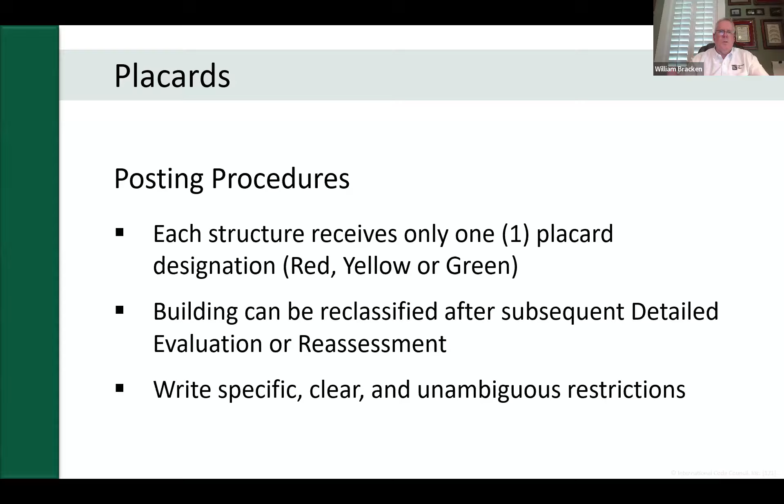Another universal rule is that a building's classification, its red, yellow, or green status, can and often does change based on aftershocks, additional weather events, anything of that nature. When we are doing a yellow placard and we are putting restrictions, or a green or red placard, we're putting notes. The individuals are being trained to keep those notes concise and short.

Finally, the posting procedures. On a residential structure, one placard placed next to the front door or the primary means of ingress. Doesn't matter how they go out, it's the primary point of ingress. Because remember, that placard is being put there for the public. And so for residences, one placard next to the front door or the primary point of ingress.

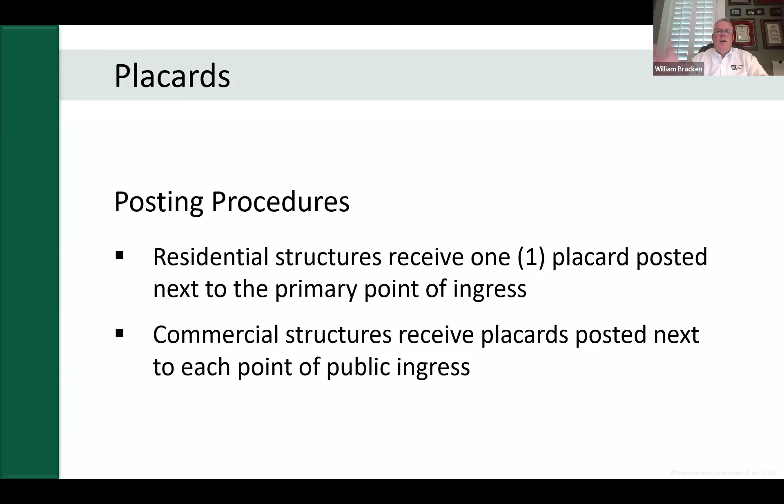In a commercial building, a placard next to every point of public ingress. So if I have a commercial building with 4 entrances, I will put up 4 signs, one next to each of the 4 entrances. And so that, my friends, is the training.

It was something to sit through. I recognize that. I appreciate you sitting through it. But please keep in mind, I went through that very quickly and at a very high level. The training, as I said at the start, is between 6 and 8 hours to deliver. It's very practice oriented, very example heavy, with the intent of making sure that individuals are properly trained before going out the door to do this. So with that, Jose, I'm going to stop sharing, open it up, and see if there's any questions or anything else.

Well, thank you, Bill. That was amazing. I know the training is very extensive, but I actually took the 2-day class, and I was actually certified on that as a building official. First of all, I want to apologize because I didn't introduce you properly. I know your bio was in the presentation, but Bill has over 40 years of experience in this field, as a structural engineer, and he's very passionate about this work.

I got one question that I was going to answer based on my experience, but I'm going to let you answer that. If the building has 1% damage, do I classify it as uninhabitable? That's interesting because I don't know if we actually evaluate by percentage. How do you look at the situation? Well, you make a good point, Jose. We don't really look at it by percentage.